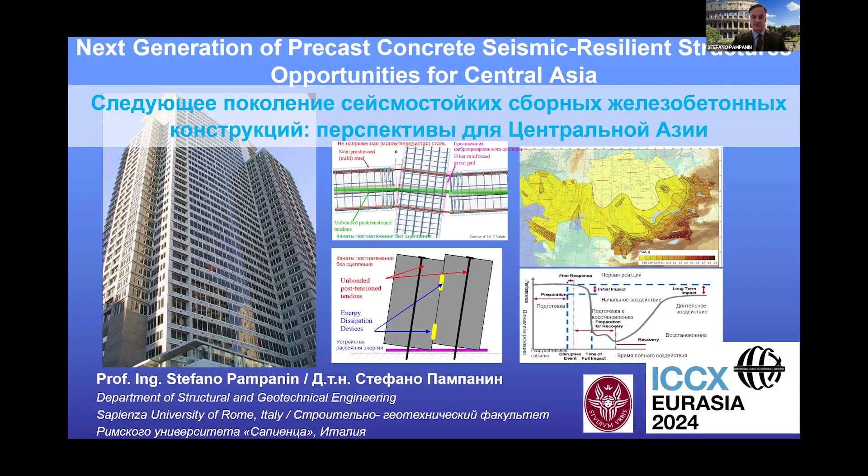If we go to see the seismic map using peak ground acceleration, which is a typical way to describe earthquake intensity everywhere around the world, very recently, like everywhere else, Kazakhstan has been provided with a PSHA, probabilistic seismic hazard map, which allows calculation of the probability of occurrence of an earthquake of a certain intensity within the lifespan of the building, or structure. It can be 50 years, and typically in 50 years we look at the probability of exceedance of 5%, or 10%, or 2% in 50 years.

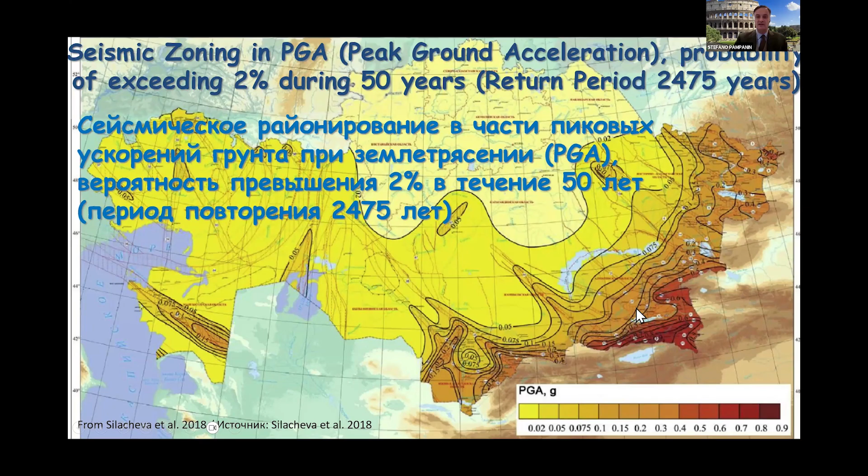And typically the design is for a 475 year return period, so 10% in 50 years. But what I want to show you here is a little bit higher earthquake, the 2,500 year return period, an earthquake supposed to have an exceedance of 2% in 50 years. If you think about 2% in 50 years for a lifespan of 3 generations, which is 100 years, it's going to be 4%, and the design level is going to be 20% probability of occurrence. So the level of peak ground acceleration is quite substantial, getting into the yellow zone and increasing the more we go to the southeast. In fact, Kazakhstan has been struck by very strong earthquakes of magnitude 7-ish.

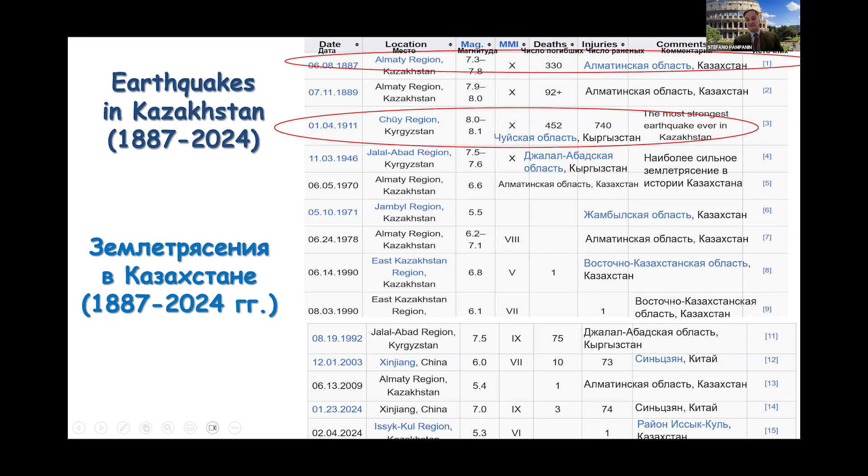7.3, 7.5, 7.9, 8. Especially in the end of the 1800s, in the Almaty region, there was a major earthquake, also called the Verny earthquake. Later on, in the early 1900s, 1911, there was probably the biggest one recorded, on the border with Kyrgyzstan, also called the Kemin earthquake. That type of earthquake event caused substantial collapse. So the region of Almaty, or not only Almaty but the whole of Kazakhstan and Central Asia, is definitely very prone to very severe earthquakes.

If we look at what precast concrete can provide the community with, precast concrete in seismic regions has been limited in use and development basically everywhere around the world for a few reasons. First of all, lack of confidence. The performance of precast concrete buildings, because of detailing and design issues, not because of the material, has not been adequate as people would have liked to see. So people lost confidence in the behavior of precast concrete in seismic regions.

There was also, generally speaking, the absence of rational seismic design provisions. Typically we're talking about the 1990s, and then later on things improved. In the 1990s, people were not very confident or comfortable using precast concrete in seismic regions, and there was a lack of knowledge — lack of seismic codes, but also lack of education. It was not being taught in universities. So very few engineers or architects were able to specify precast concrete properly for seismic design.

Later on, what happened? Typically the trend was to either avoid precast concrete or to allow it if it used an emulative approach. We'll see what emulative approach means — it's an emulation of cast-in-place concrete, whereby precast concrete connections are joined together using a cast-in-situ approach, and that has been a way to deliver precast concrete in seismic regions in a proper way.

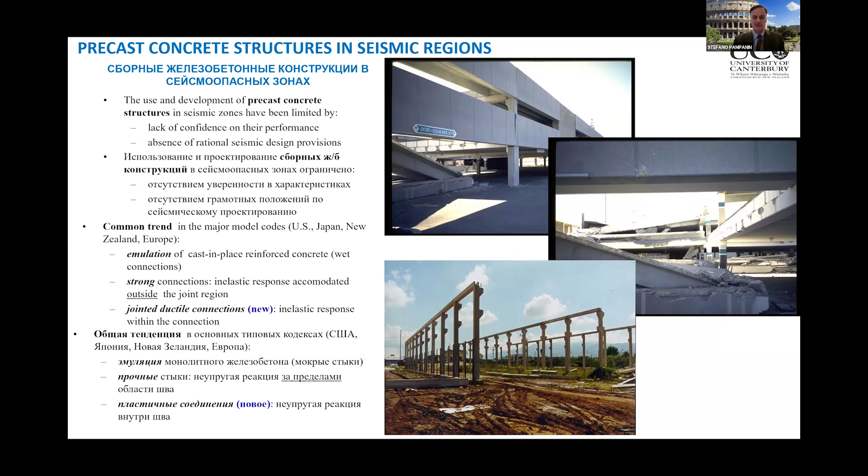But there is a third level, and that third level is really a breakthrough — a milestone in earthquake engineering, which has been applied in precast concrete and later on in other materials too. It's about jointed ductile connection. It's new. Jointed ductile connection is different from the old precast concrete approach used for industrial plants, and from the emulative approach, which is a bit less old but still obsolete compared to this revolution, which I'll be delighted to explore with you. I'm showing now the Russian translation to appreciate more what jointed ductile connection will look like.

Now let's discuss some fundamental aspects of seismic design of precast concrete. Precast concrete itself can be designed very properly if you know what you're doing, as with any other material. You need a design methodology which is appropriate — not just force-based design, as people typically use, but also displacement-based design, where we try to limit the deformation of the building for a given earthquake, such that the extent of drift — the displacement between two stories divided by the height, called drift — and the amount of rotation of a certain element are limited. So we are designing for a specific amount of displacement, no more than that.

Generally speaking, we need to understand the overall behavior: the structural system itself, the diaphragm, the non-structural elements, the foundation. The whole system has to deliver the seismic response as a package — it cannot be just one element or other elements. There should be a load path, the possibility of moving stresses through the structure properly. Detailing is fundamental — the connection detailing between elements, a beam and a column, a wall and the diaphragm, and the seismic resisting frame, needs to be properly done.

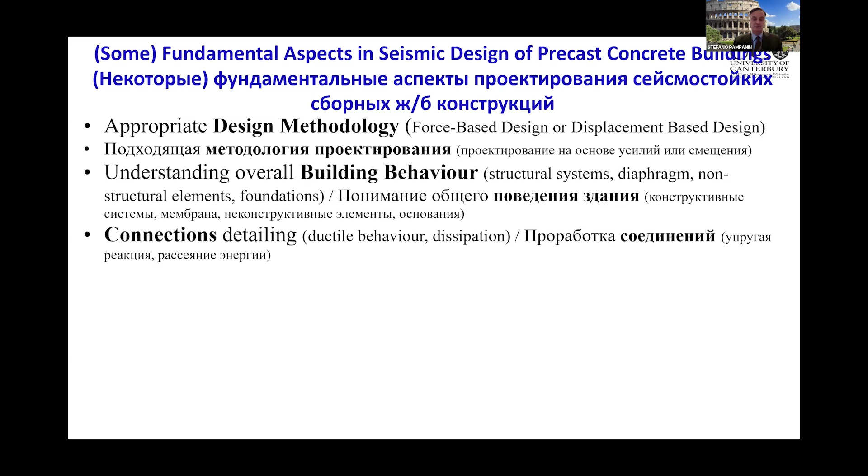Detailing is fundamental, as well as robustness. Robustness and redundancy are not exactly the same thing, but it means that during an earthquake we have a different alternative load path. So the opportunity and possibility of our building to resist the earthquake is provided by more than one type of element and structural system.

And also, if something goes wrong, there is a plan B. There is an opportunity to back up the behavior of the structure, because you're not relying upon a single structural system or a single load path. Displacement compatibility, the compatibility of movement between the seismic resisting system and the gravity system, should be checked very carefully. It's not only about strengthening a building with some elements, but about checking the full movement of everything. At the end, it's about detailing, detailing, and detailing.

So really, at the end of the day, we need to provide a system whereby detailing is the devil which we have to fight against. Otherwise things can go wrong. If detailing is properly done, that will count more than any computational model you can provide, because numerical models do mathematically what you input. If the input isn't good enough, the output won't be good enough either. But detailing, using conceptual design as a proper engineer would do, is fundamental for good behavior in a seismic region.

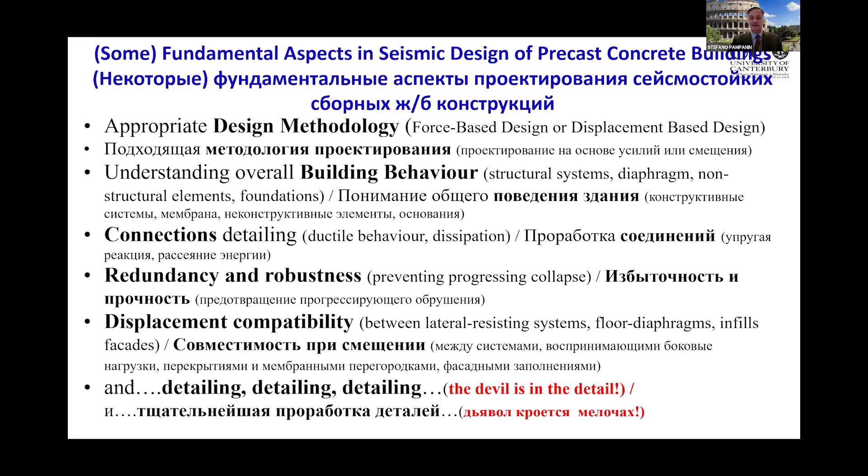We are going to start by looking at hinge connections, the old way. I'm going to show you what has been done everywhere in the world, including in your own country, very specifically for precast industrial buildings.

This type of construction is very powerful. For gravity design it can allow you to go for long spans, with beams sitting simply on corbels. These corbels drive the forces into a cantilever scheme, which is not optimum, but that's what the solution was. So a cantilever column is actually the seismic resisting system with only simply supported beams, not coupling the behavior. These systems are very good for gravity loading, but not good for earthquake loading.

And this is what we unfortunately found. But we'd like to explain that we don't have to throw away everything here. It's a matter of detailing the connection between beams and columns. If we can do it differently than just sitting on a friction corbel, or maybe using a dowel action, and improve that connection between beam and column, and between column and foundation, we can make the system more robust. That will be the way.

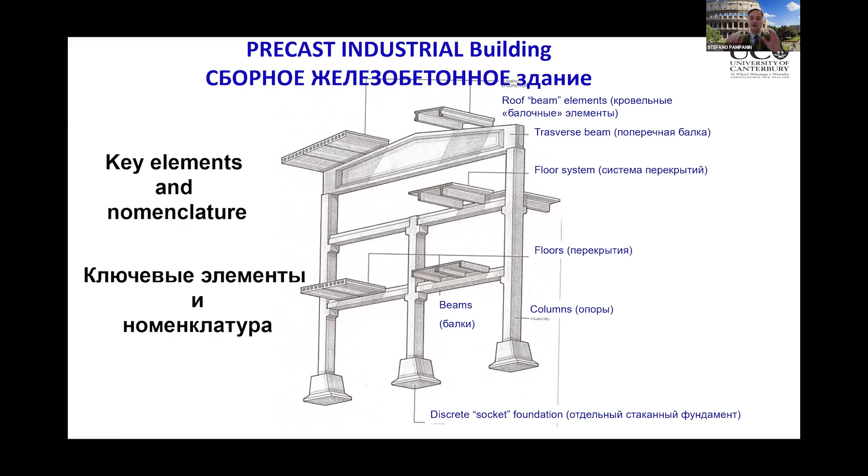So this solution number one, which has been the oldest and not very appropriate for seismic regions, I would like through the presentation to show you the evolution of hinge connections into something more - option 2 - and into something even more - option 3.

Now, we do know about industrial buildings: precast car parking, malls, warehouses, department stores. These are large column-free type buildings, and the idea was to push for pre-stressed and precast concrete elements which could go for long spans. The problem with this solution, though, is that you do not have a proper moment-resisting connection.

So the advantages are quality control, speed of erection, dry construction. You can go fast, and have good quality control off-site in your plant. Once you go to the building site, you don't need a very high-skilled crew for construction - you only need riggers, people capable of using a crane, to mount what is essentially a Lego type of construction system.

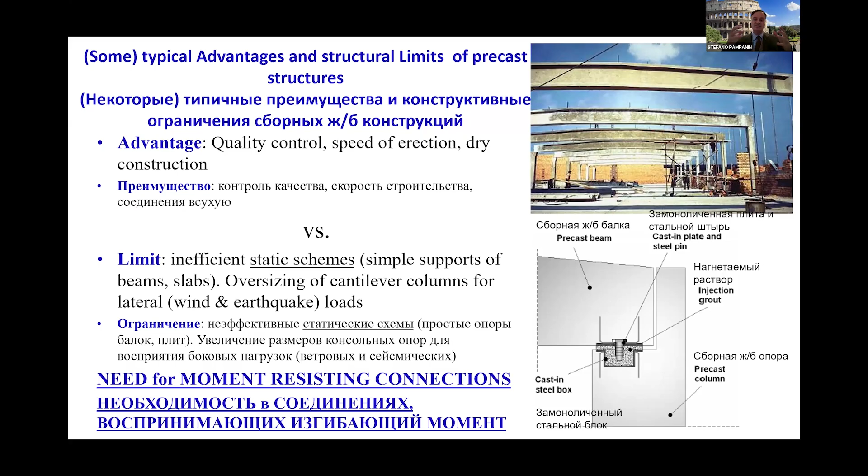But these advantages are undermined by very important limitations. The structural systems themselves are not well connected - actually they are even not connected, or connected in a way that is not efficient. So the structural scheme is not capable of providing moment resistance. We do need, in seismic regions, to provide moment resisting capacity between connections. Otherwise the system will be too weak under lateral loading. It would be very good for gravity loading only, but very weak for lateral loading.

So let's see what has been developed in the few years since the old way of doing things. These are examples of the emulative approach.

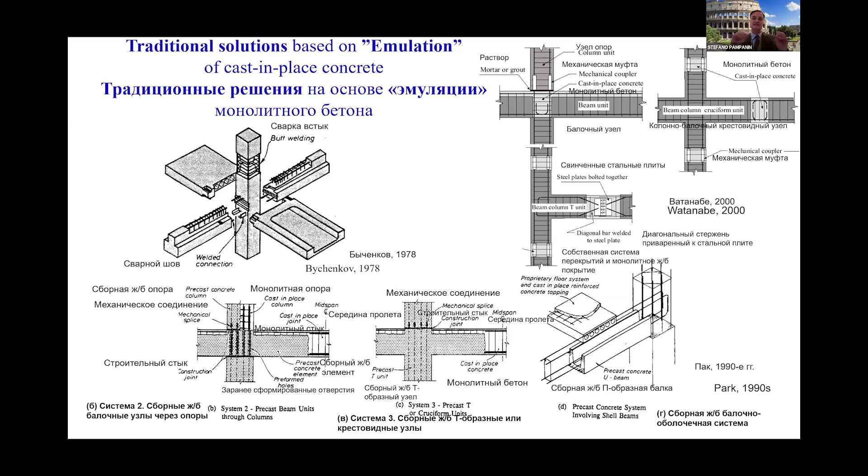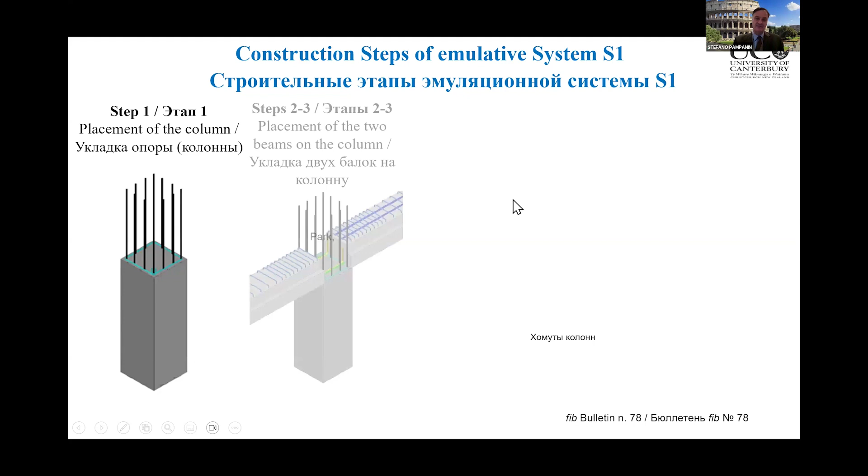There's been plenty of alternative solutions for that. I want to show you some of the latest developments from bulletins of the FIB, the International Federation for Structural Concrete, which I strongly recommend you look at and become a member, because you can find very interesting solutions explained from a conceptual design point of view, a mechanical modeling point of view, a numerical model point of view, behavior, guidelines for better design, and more about durability, hardware, detailing, connection, and technology.

So you start from a column, and in the emulative approach you have precast beams sitting on the corbel, and then you have a cast-in-situ connection of the whole system. The beam can be a rectangular type or a U shape, which we call a shell beam.

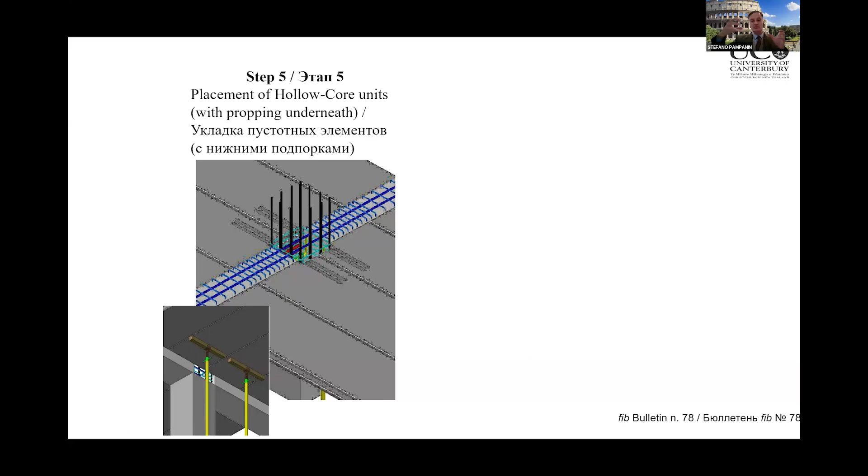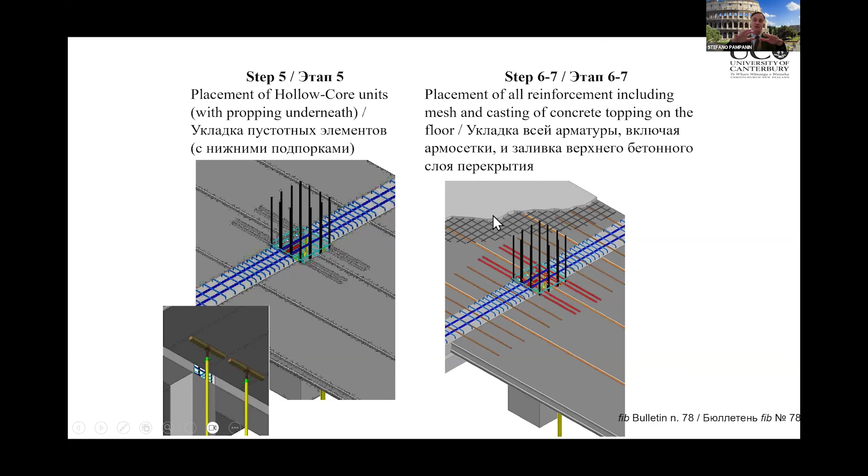Then you come to the flooring system. It's supported on shores, and then you have a cast-in-situ topping. The diaphragm action works through a welded wire mesh or more proper reinforcing detailing on the flooring system, and the whole system becomes monolithic. But it started from precast elements being connected together with a cast-in-situ approach.

Now, these are examples of what this emulative approach would be, and I'm going back on purpose to L'Aquila. By the way, you'll have noted the screen behind me is the Colosseum. I'm calling from Rome, the University Sapienza of Rome, where I'm now working.

I've been traveling around the world in my career and my life, from Pavia, Italy, in the northern part of Italy, to California, San Diego, and then 16 years in New Zealand, and then back to Italy in Rome.

The reason I'm showing the Colosseum is not only because it's marvelous, but because it's actually an example of prefabrication, which looks like precast concrete frames in the older ages. I will explain how, by taking hints and suggestions from that way of doing prefabrication, we can deliver a much higher performing, low damage seismic resistant system.

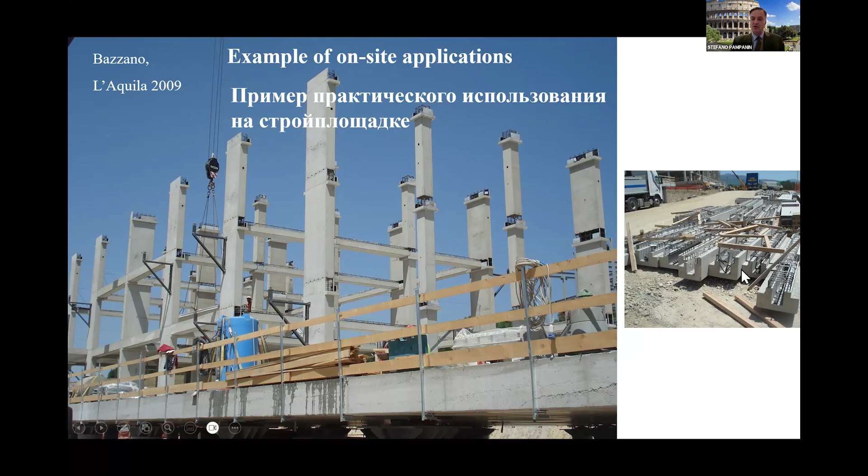This is option 3, which I'm going to show you later on. But these are examples of the emulative approach developed in Italy after the L'Aquila earthquake: shell beams, which are connected together with other elements using a wet connection. They can do an excellent job in providing semi-precast elements with a more moment-resistant connection.

But there are consequences and limitations. Let's stay on the positives for now.

What are the limitations of this connection detailing based on the emulative approach? Precast, then precast, then wet connection — they do not exploit the advantage of precast concrete. Basically, you're not able to go as fast as you could because the precast concrete is slowed down by waiting for the casting of the wet connection to cure.

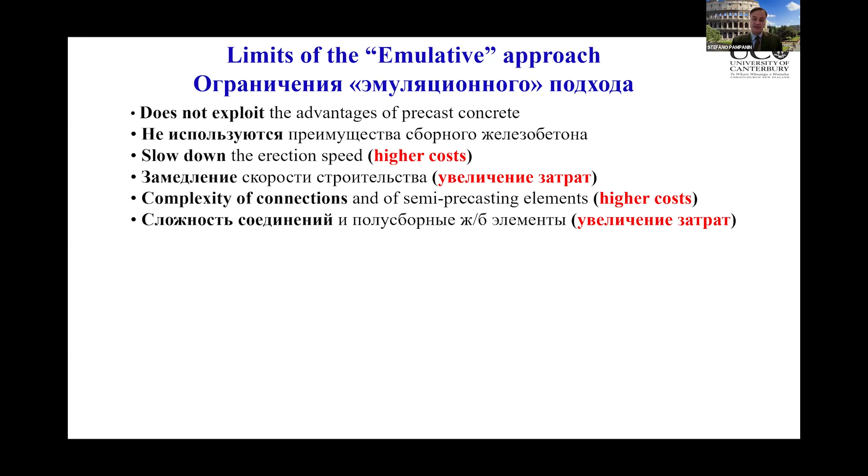So you have to wait a bit. Also, slowing down the erection speed means higher cost—your client is paying more, the mortgage on the building costs more, and you have to wait to sell the components, the apartments of the buildings, and so forth. But also, the connections are quite complex, requiring quite a manufacturing skill, and time in the plant. Skill and time means, again, money.

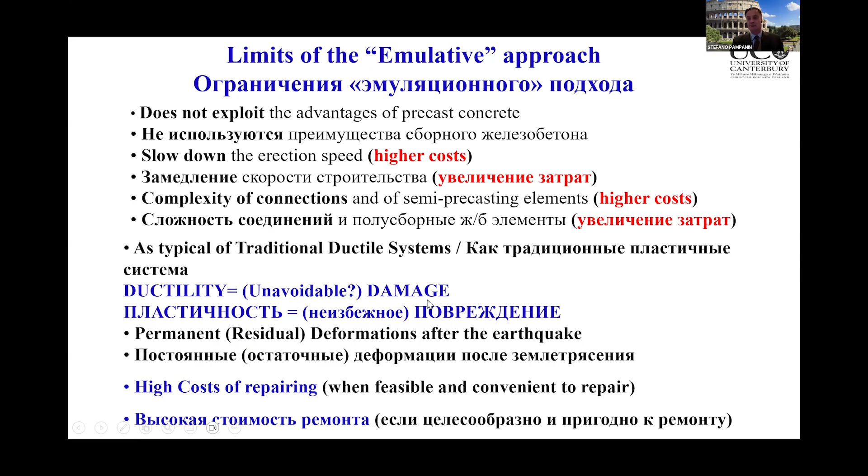In addition, a traditional emulative system will form a plastic hinge. The plastic hinge is a typical way for any concrete or steel building to survive an earthquake—it's the way to damage in a plastic manner the connection between elements through that plastic flexural type ductile behavior. So if you deliver a precast concrete solution with the emulative approach, you would necessarily have almost unavoidable damage. We don't want that, but this is what every code in the world allows.

So I want to show you something which is a dramatic experience that I unfortunately lived through. So I'm here reporting back to you. In Christchurch, New Zealand, we are going to the other side of the world from Italy—nearby, more near to you.

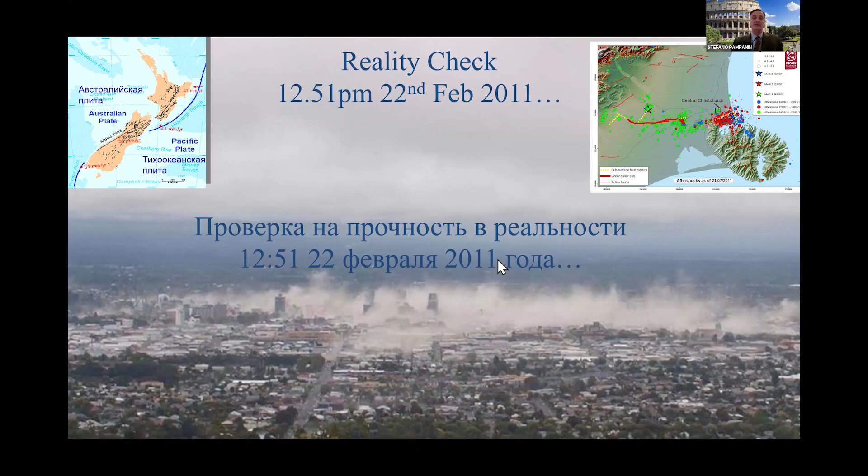In 2010, 2011, there was a series of earthquakes; specifically the 2011 one, on the 22nd of February, destroyed the city of Christchurch. That earthquake caused quite a number of victims, 185, but also caused a significant social and economic impact because the whole city, the CBD, the central business district, got destroyed.

So I want to show you an example of an exceptionally good 22-story precast concrete building designed in the 80s. Excellent design, which today we are still using as an example of best emulative approach made of precast concrete.

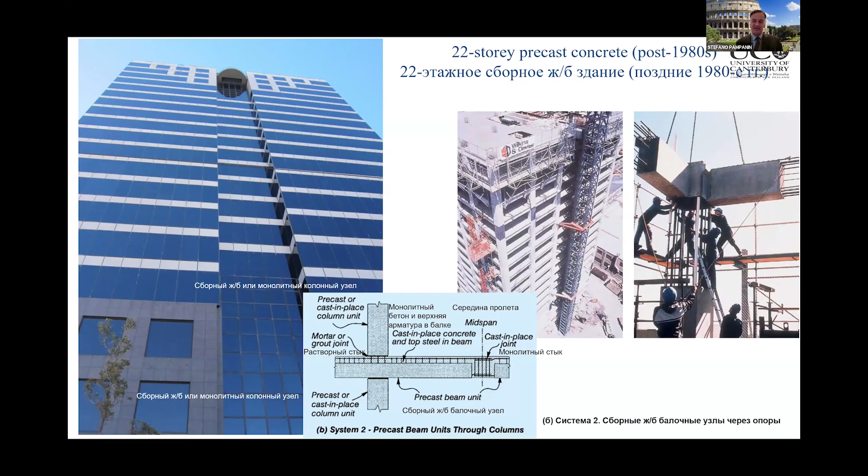You can see here the precast concrete elements. They are getting connected together, as you can see here, at the quarter or fifth of the span, or in the middle of the span, where the moment demand is going to be lower because of the seismic action. This earthquake pushed the building to the limit.

And so the earthquake itself showed that the building was designed very properly. The building developed those famous plastic hinges—we call them plastic hinges in the beam. Any new design around the world will rely upon these plastic hinges in the beam.

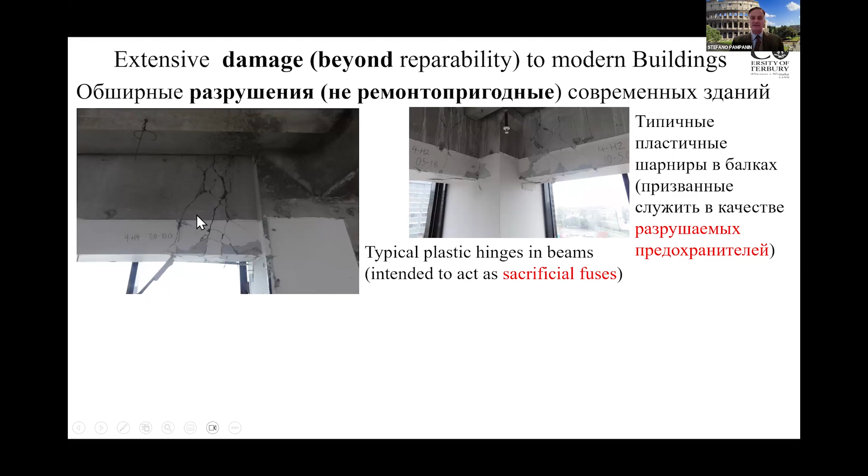The problem is that after you have this plastic hinge in the beam, you don't know how to repair it. If we make a comparison with a car crash test, no one will be surprised to see, or to remember, that in a crash test our car is destroying locally, in a plastic behavior, the front part to protect the pilot. So the car is actually plasticizing in a specific region, which is designed specifically for that purpose.

And the purpose is survival of the pilot, which we will call life safety. In our seismic design, we call this life safety. So what does it look like?

In a numerical model, which nowadays we are able to perform—and now we're able to go faster—this is a representation of our plastic hinge in our car crash. It's not a car crash, it's an earthquake crash against our building. So our building is going to go through the earthquake crash test, and is going to develop that plastic fuse. That plastic fuse allows the building to protect the life of the inhabitants, but not to protect itself.

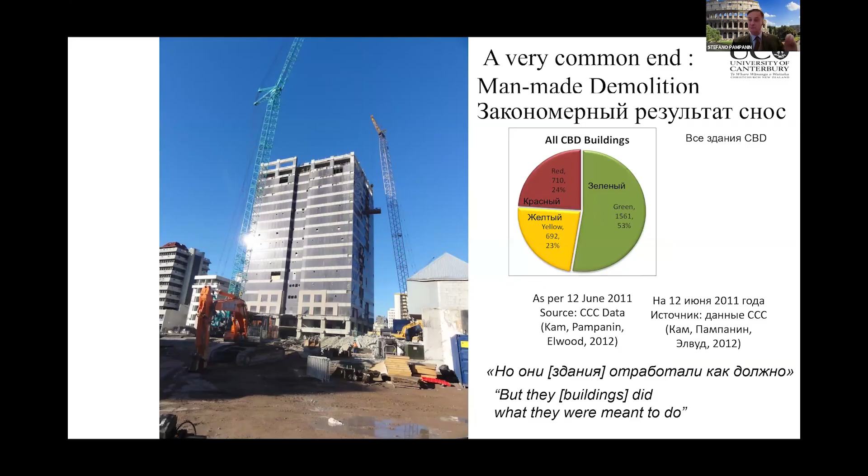So what was not clear for quite a few decades, when human beings were improving the seismic resistant philosophy, was being able to actually concentrate the damage into a specific location instead of allowing the building to collapse. It was a major revolution in 1960, and it did come from New Zealand.

Park and Paulay developed what we call hierarchy of strength, or capacity design. The theory of the chain that Tom Paulay was using mentioned that the weakest link of the chain makes the chain's strength. So the strength of the chain in tension is actually due to the weakest link. If the weakest link is ductile, you're going to have a ductile mode of failure. If the weakest link is brittle, the whole chain will be brittle—it doesn't matter what the other links are going to do.

In the 1960s, we completely changed our way of designing for earthquakes. Instead of having small columns and big beams, Park and Paulay suggested stronger columns and weaker beams, to the point that the weaker beams were supposed to have a plastic hinge. And that's exactly what we've been doing, designing properly for plastic hinges in specific regions.

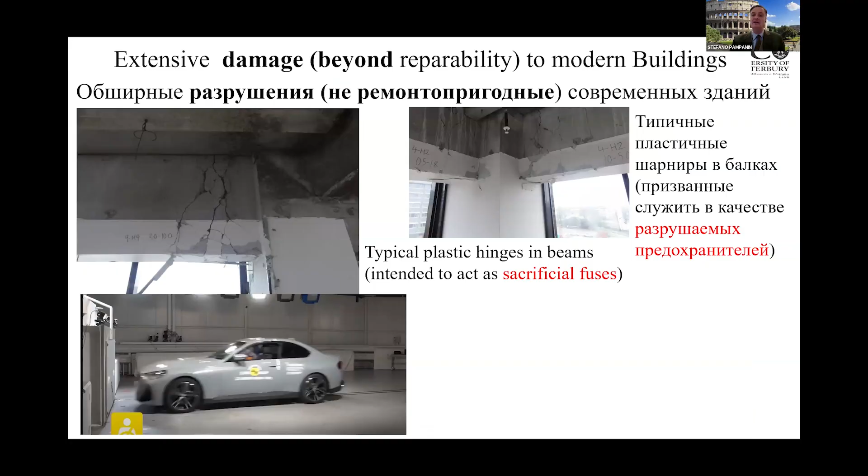Let's remember what these plastic hinges are doing. They are protecting not the car, they are protecting the pilot. They are doing their job for life safety. And that's exactly what we're doing: designing for life safety.

The cost to the population, for the whole country, was 25% of the gross domestic product. So we are not able to afford, as a single family, as an individual or multiple owner of a building, or as a city, such a disruption of our community in the long term.

Of course, the most important part remains life safety, and we need to deliver modern buildings capable of providing that. But precast concrete can do that kind of protection, and even more—that's exactly what I'm going to show you. What has been shown so far is the standard 2024 state of the art of seismic resistance that we're typically able to provide, but we need to do something better.

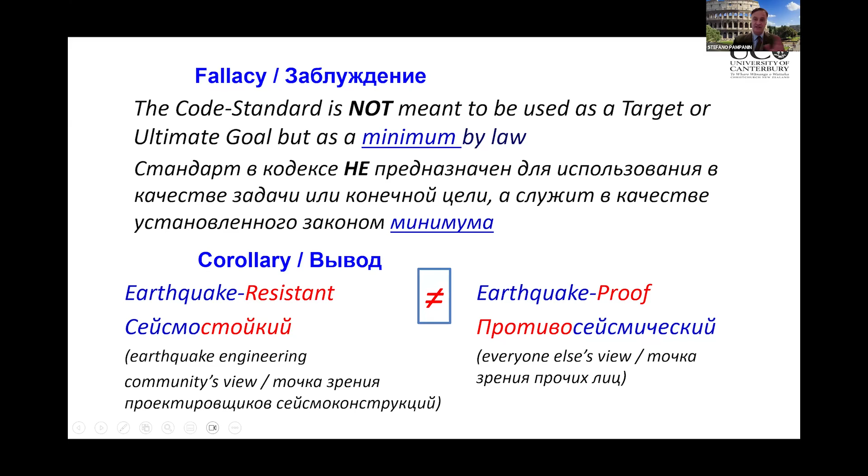That's not what we have by law. By law, everywhere in the world, we have a seismic-resistant or an earthquake-resistant building, which is exactly different from, very far away from, earthquake-proof. It's not earthquake-proof.

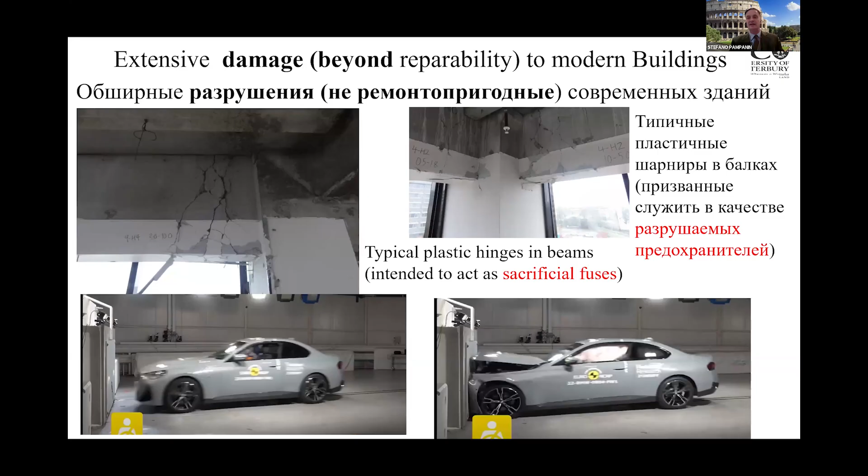This car over here, no one ever thought about calling this car anti-accident or accident-proof. No one thinks a car is accident-proof. People hope that it is life safety proof, so it's actually death proof. It's capable of providing life safety, but we don't think about the car being repairable after a major crash.

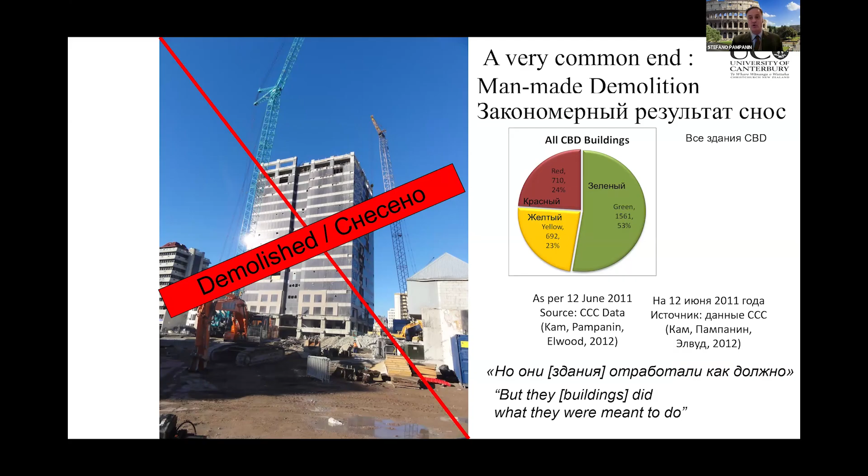We do need to start thinking about what to do for earthquake-resistant buildings, because if they were like normal cars, which are not repairable, then we will be following the same path of what happened in New Zealand, which is a very high-level modern country.

So let's keep going fast and quick. What should we do? We should be targeting a higher performance. In a nutshell, we have to raise the bar. We need to design a building such that the building itself will be protected from a crash test, not only the people living in the building.

This means something which can be a problem. If it is going to cost too much, then people will not be doing it. If it's going to be a matter of designing a nuclear power plant instead of a house, obviously it's not going to happen. So I give you good news.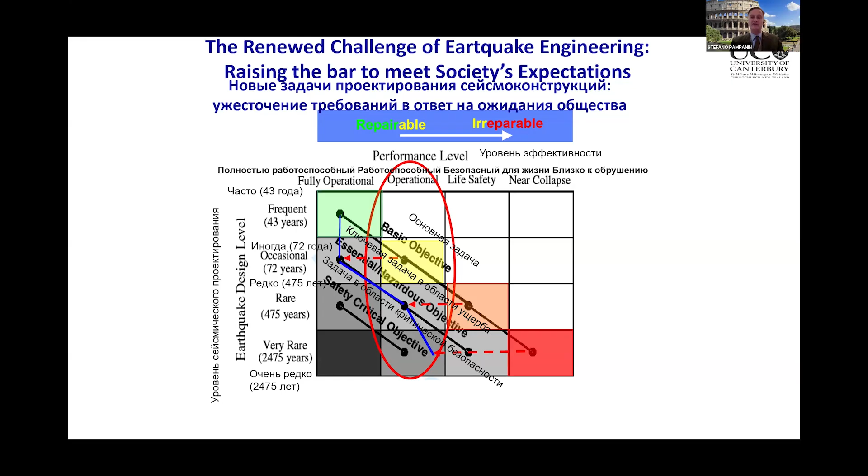The good news is that, for people listening in real life in Almaty or virtually remotely, we do have the technology in 2024 to raise the bar and create almost, not exactly, but almost earthquake-proof buildings. We do not have earthquake-proof, but we are able almost to get there. And precast concrete has the solution to make it happen.

So going back a little bit to the presentation of today, it's about opportunities from Central Asia to use precast concrete. And I'm telling you that precast concrete has been used widely and fantastically in every country in the world in some form of option 1, but in seismic regions it doesn't work.

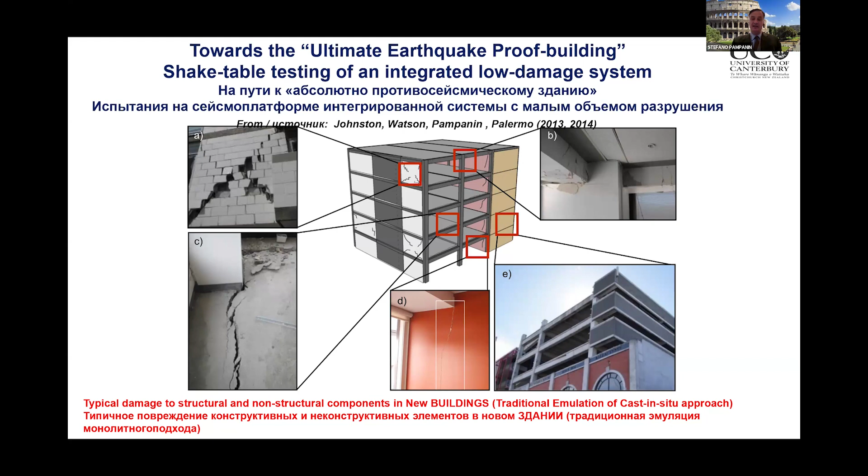With option 2, which is great, and I would suggest you at least use option 2, the emulative approach, but in seismic regions it's not sufficient enough. There's going to be a cost associated with the repairing, which we don't want to have. So what will be the next level up? That's exactly where we're going.

Jointed ductile connection - we call them low damage technology. Low damage technology means that after an earthquake, we would like to have low damage in the car, in the building, and we should be able to repair it without too much cost. There's a new generation of seismic resistant systems, which I don't call earthquake proof, but they are very, very nearby to becoming earthquake proof. They are low damage. We call them low damage.

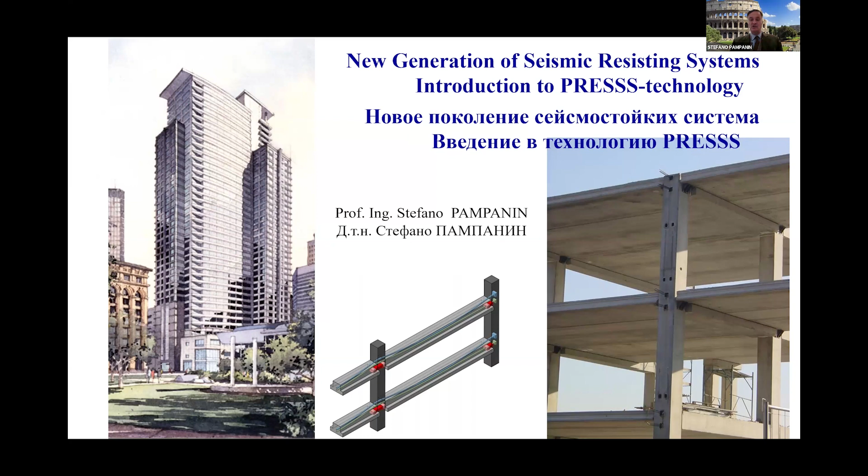This low damage seismic resistant system has been developed starting from the late 90s, so we're going back 25 years ago, in United States, a big project coordinated by Professor Nigel Priestley, who was the top professor in earthquake engineering, number one in the world at that time. Park and Paulay and Priestley.

Park and Paulay were in New Zealand. Priestley was a student of theirs, doing his PhD, then lecturer, then professor and engineer, working with them as a PhD student of Park and Paulay. Then he got recruited in San Diego, California, in the 1980s. And at that time, he developed, through a major project with the precast concrete industry in the States, a new solution, a new way of working on it.

Thanks to an amazing team - I'm referring to John Stanton and Susie Nakaki, for example - who tested, with plenty of other people, this 5-story building in San Diego.

It's a 5-story building which was tested as the largest test using precast concrete, with a revolutionary, non-emulative approach. I had the honor in 1998, 1999 to be part of that. This is me 25 years ago, and 25 kilograms ago if you wish, but I still maintain the same passion and enthusiasm for novelties.

So learning from those ropes in the 1990s, what are these types of connections? There's quite a lot of legacy that has been implemented into this connection. They are dry, elements connected through tendons. So we are basically using the same concept of post-tensioning which has been adopted for bridges.

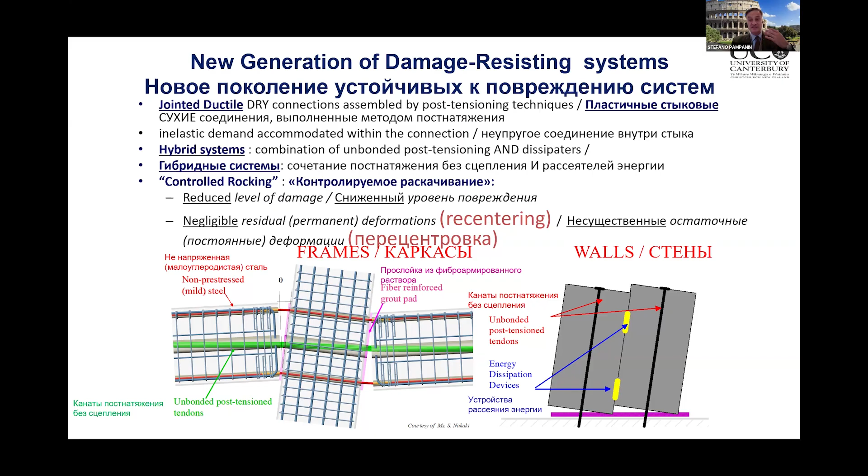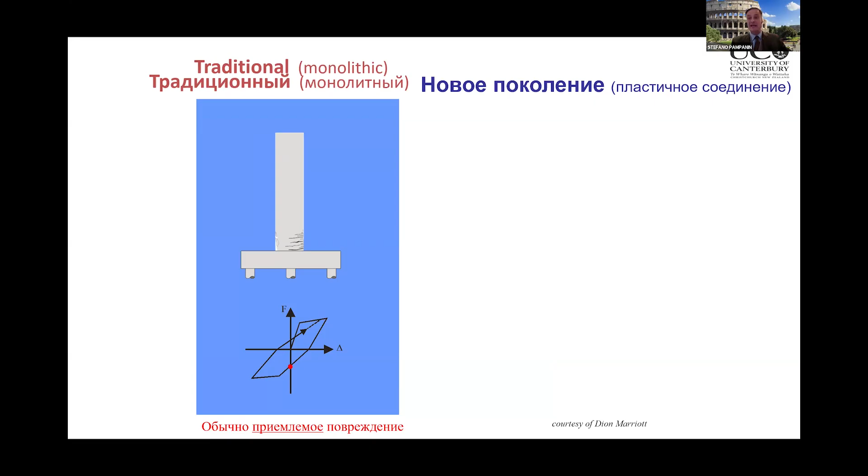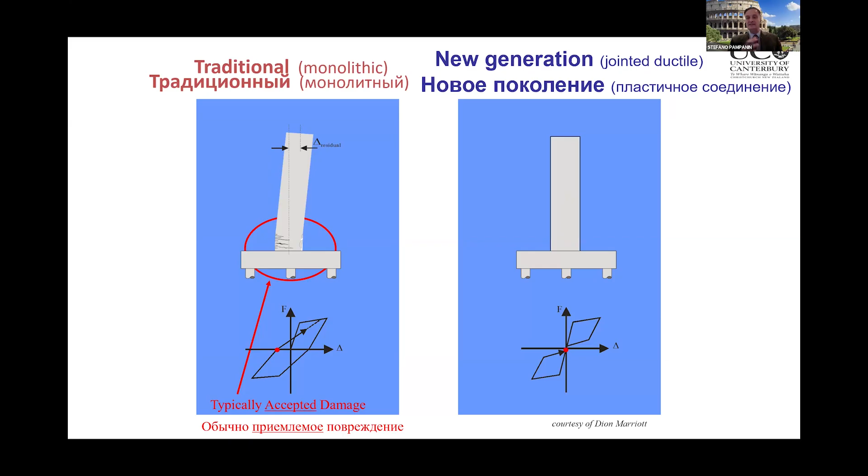Let's see what it looks like. In a traditional concrete approach or a cast-in-situ emulative approach, you're going to break back and forth, and you're going to have this famous damage which we don't know how to repair. In the new generation, the terminology is rocking. Rocking is actually this lifting up and coming down, lifting up and coming down. By doing this lifting up and tensioning the spring, you're basically able to go through an earthquake without damage or with low damage.

Where does it come from? I told you there is a reason for which I was using the Colosseum today, not only because I'm in Rome, but because this way of constructing was one of the main reasons we are now able to develop a modern low damage technology.

This has been revolutionary, taking that type of rocking system and adopting it into a rocking, post-tensioned, new modern way of doing precast. It's literally a milestone in earthquake engineering.

If the first milestone, probably the main one, in earthquake engineering was the capacity design of hierarchical strength that I mentioned, from Park and Paulay, Professor Park and Professor Paulay at the University of Canterbury in New Zealand, which I then, not coincidentally, went to because it was a fantastic place to learn, and I stayed there for 16 years.

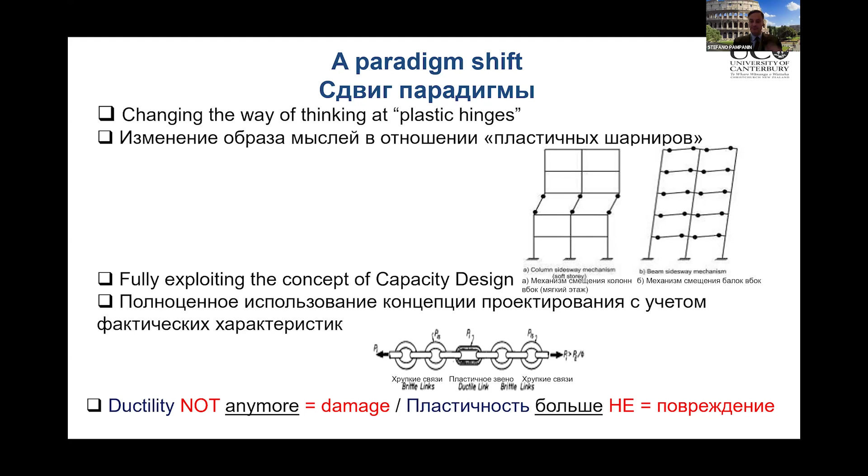So if capacity design was a way to protect the small columns and big beams by making the columns larger, then the next step was to make the weakest link of the chain not only ductile, but also repairable. And so we started doing this type of evolution.

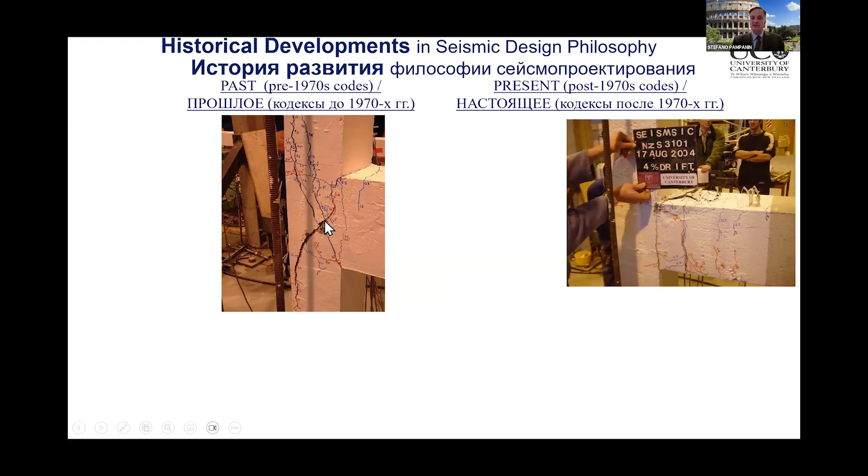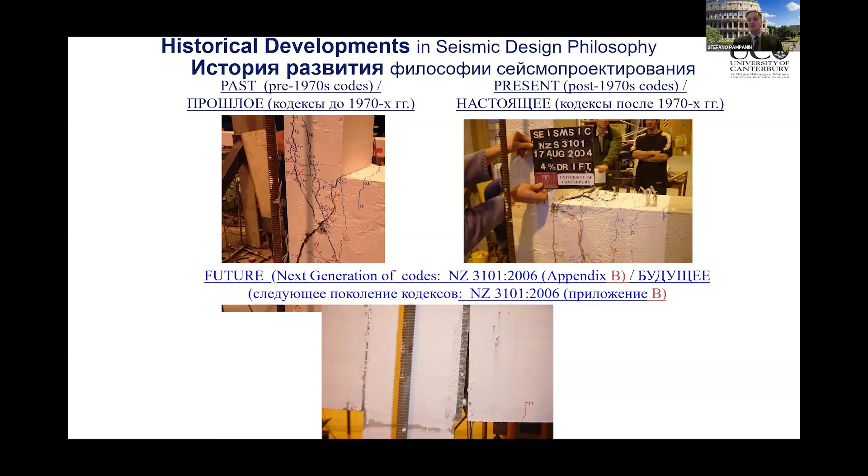In the pre-70s, older type of beam-column connections were breaking in shear. In new connections, they actually break in a nice way, in a plastic hinge, but we don't know how to repair them. In the newer rocking temples, we are able to go through an earthquake with less damage. The next level up became repairability.

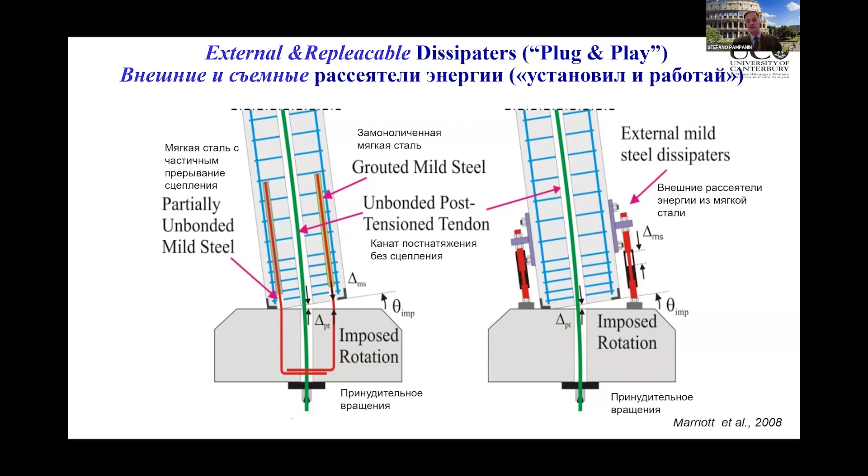We called it plug and play. This is a piece of steel placed from inside to outside, and it's a fuse. You see the fuse? It's actually like an electrical fuse, except we call it a seismic fuse. This seismic fuse, which I developed, I did not patent, so you are free to use it with my team. We developed it, tested it, and without patent, you are allowed to use it for free.

What happens? This fuse can become a gadget. You create a fuse, place it inside an anti-buckling tube, and then fill it with epoxy or mortar. This becomes your new armor. It costs $15, $20. So it's really a cheap way to provide external armoring, external steel, instead of internal steel.

After an earthquake, similar to how we typically change light bulbs in a normal day without being an electrical engineer, everyone will be able to change the plug-and-play devices, the plug-and-play fuses, without being an earthquake engineer. You can go to the supermarket and buy your extra small, or whatever size fits within your living room, bedroom, bathroom, and so forth.

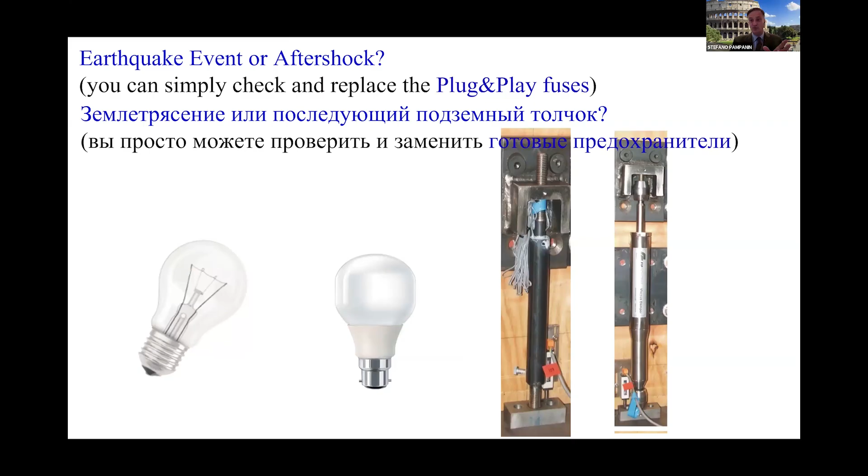So this is the extent of earthquake-resistant technology evolution. Let's call it progress. The progress in earthquake-resistant technology has been unbelievable.

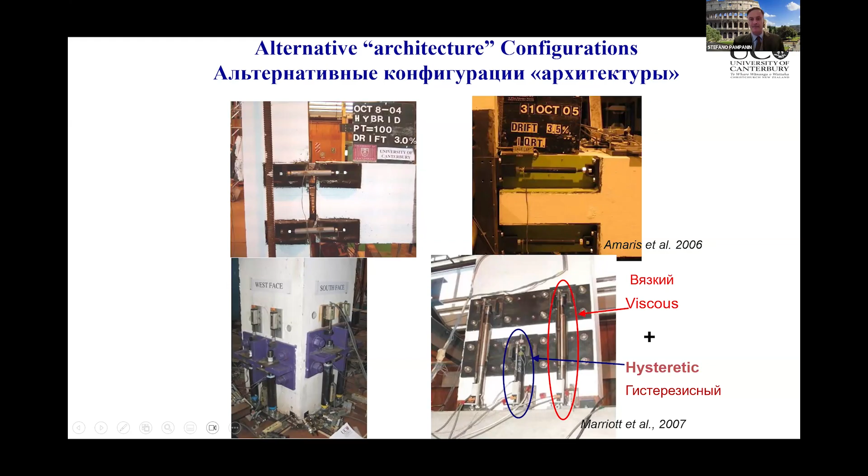This is all my research team in New Zealand. We have been pushing hard since 20 years ago, 2004, 2005, 2006, and kept going with not only beam column joint connection, wall to foundation system connection, bridge piers to foundation system connection with different types of architectural features of plug and play, but also prepared many experimental tests which became real buildings in real life.

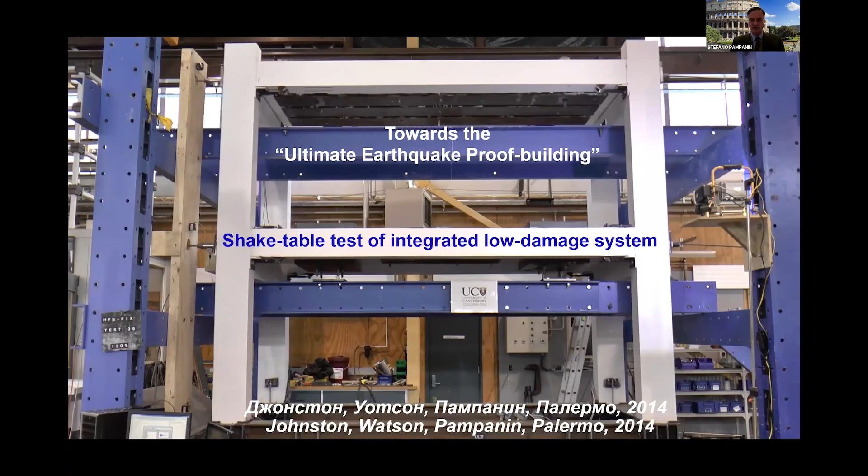So let me show you what this test of an earthquake almost looks like, you should be able to hear the sound. There's a post-tension here, it's a precast piece connected with a precast column, and there is a rocking system, which I will show you the next level up in the next slide. There is no damage whatsoever.

So if we go to the zoom, you will appreciate this movement. You see the opening of the gap, meaning it's opening, there is no damage. Again, there is a precast concrete column, a precast concrete beam, and there is a tie, horizontal post tensioning, tying together the whole system.

So this is the way to reproduce the ancient Greek temple and make it in a modern engineering way. And we are able to deliver the best solution for the community, which is earthquake resistant as they think.

Now, how can you design it? Feel free to go see the FIB Bulletins. FIB Bulletin 2004 was prepared by Bob Park as chairman and Fumio Watanabe-sensei from Japan, and I had the honor to be part of that committee as a young fellow.

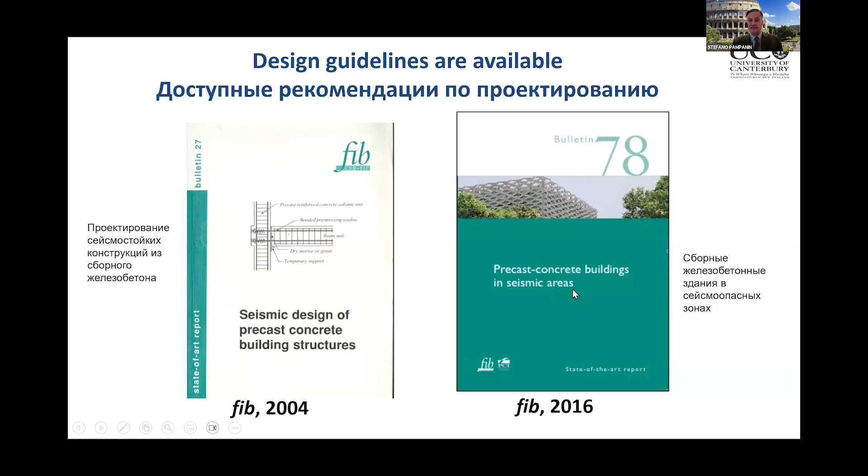And then more recently, with our great friend known to everyone in this large committee, Professor Spiros Tsoukantas, a Greek engineer and professor, did an amazing job, not only in Greece, not only internationally, but also in India, where he pushed hard to get India updated to precast concrete. If he was here, I would certainly have been delighted to have a co-presentation with him to show you the latest discussion we implemented in the FIB Bulletin 2016 about detailing for precast concrete in seismic regions.

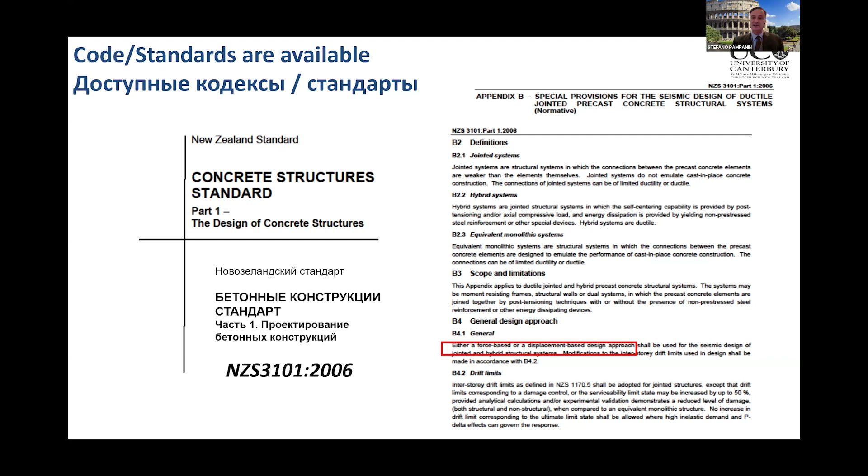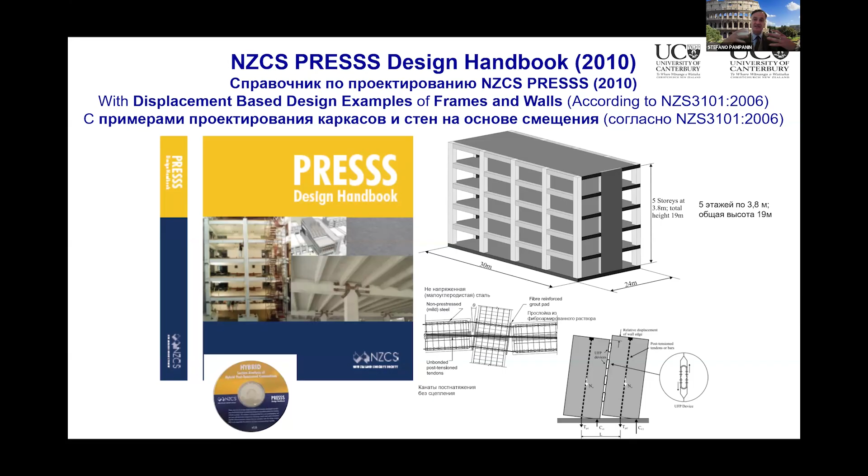We do have a code. The New Zealand Code 2006 has the opportunity to design this type of technology, and we did deliver a design example. It's in English, and maybe we can think about providing a translation for your own engineers, but we have a full design of a 5-story building as a design example, made of precast walls and precast concrete frames with this post-tensioning rocking system.

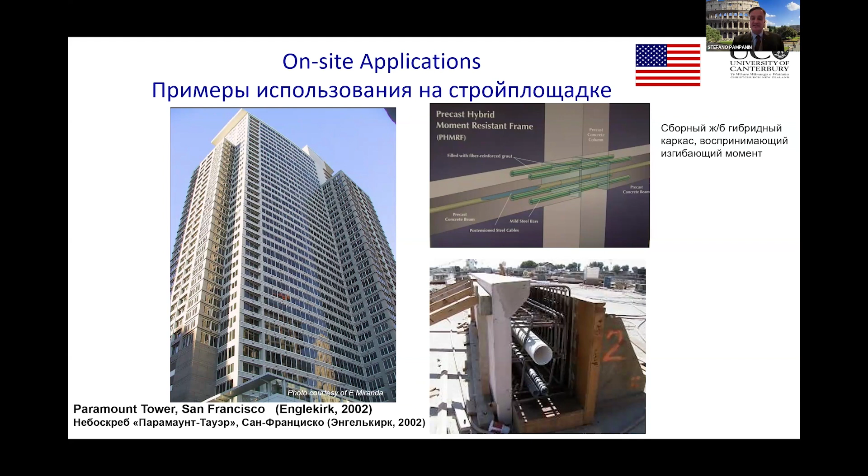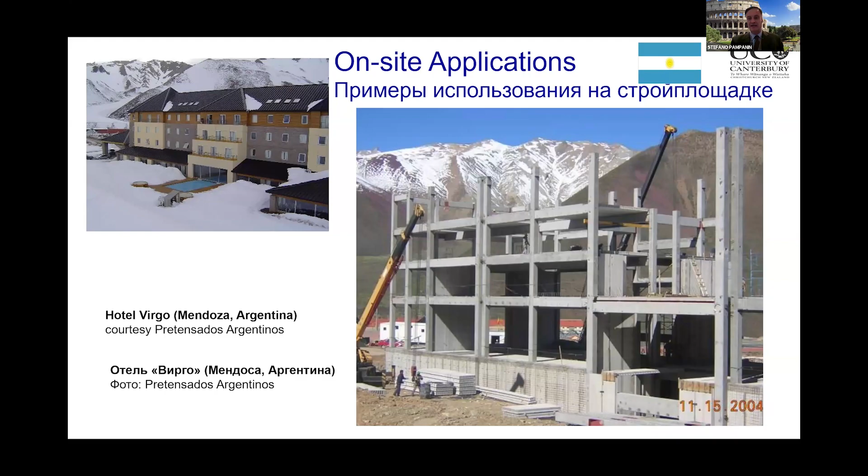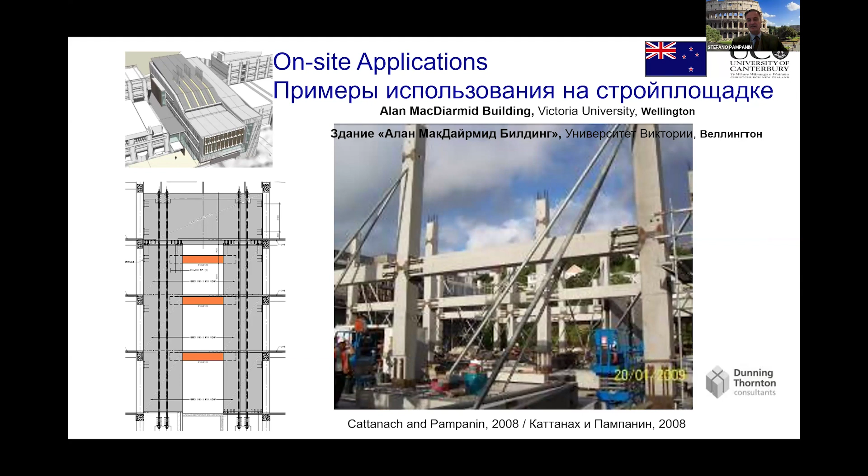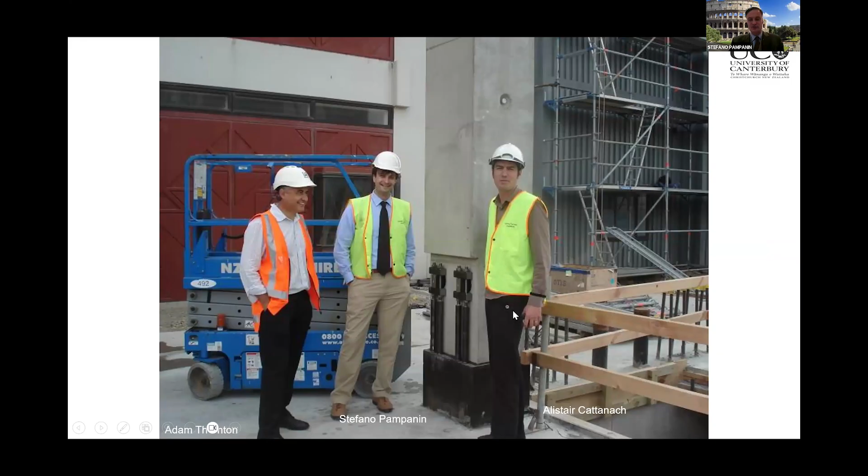People have been following and applying this in Argentina, in Costa Rica, and then in New Zealand, obviously, it was us pushing very hard. This is the first in the world where we applied the plug-and-play devices, in Wellington. These buildings are really nice and neat during construction because they are self-standing, it's really like a Lego system. And that's a younger me with two colleagues, Alistair Cattanach and Adam Thornton, directors of the engineering consulting firm we work with.

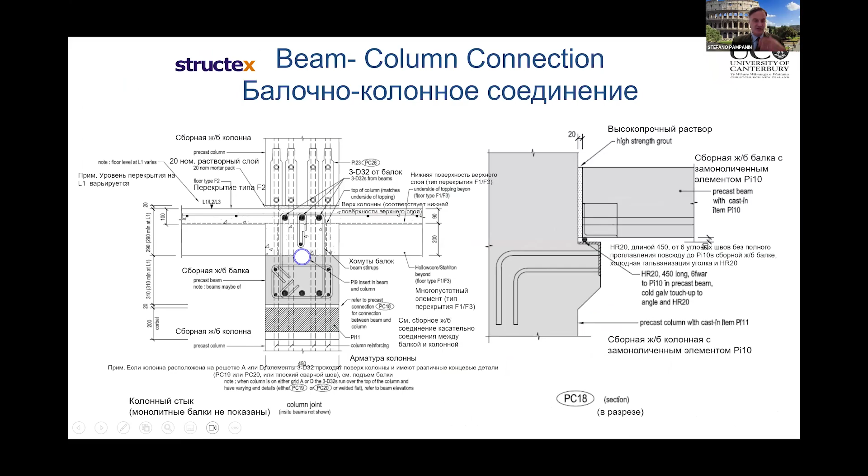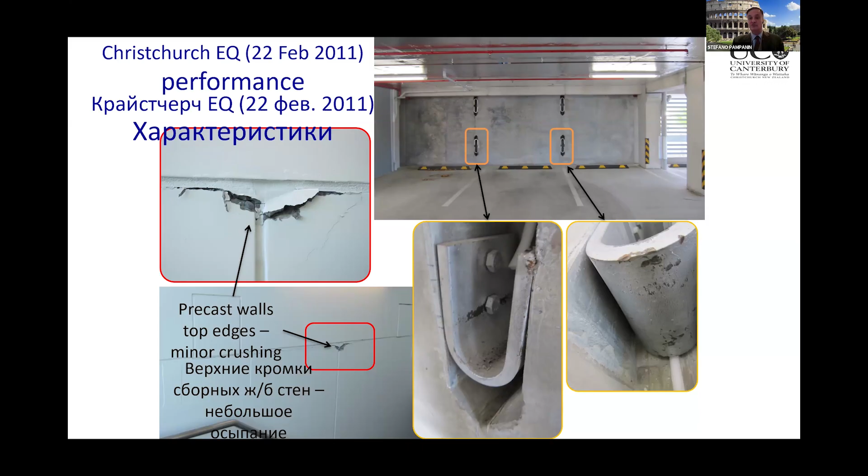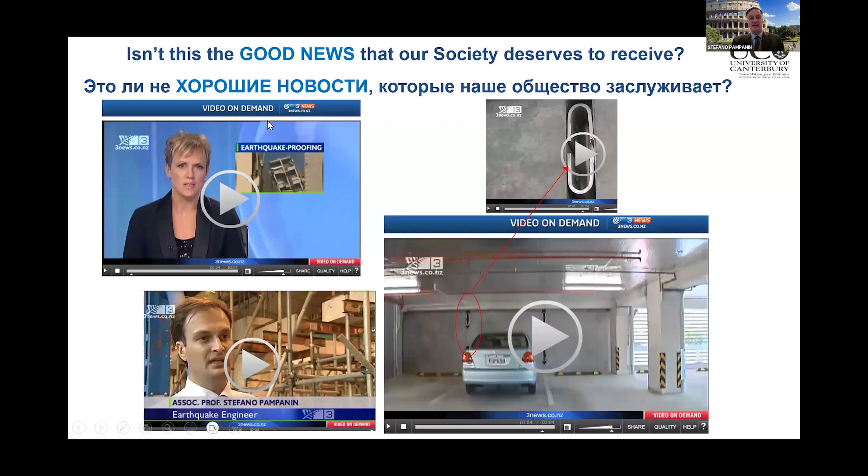That building was actually used as a private hospital, and it went on the media. The media was asking, what is this? How does it work so nicely? So everyone became aware of this type of technology, and more people wanted it, not only after the earthquake, even before, to be honest.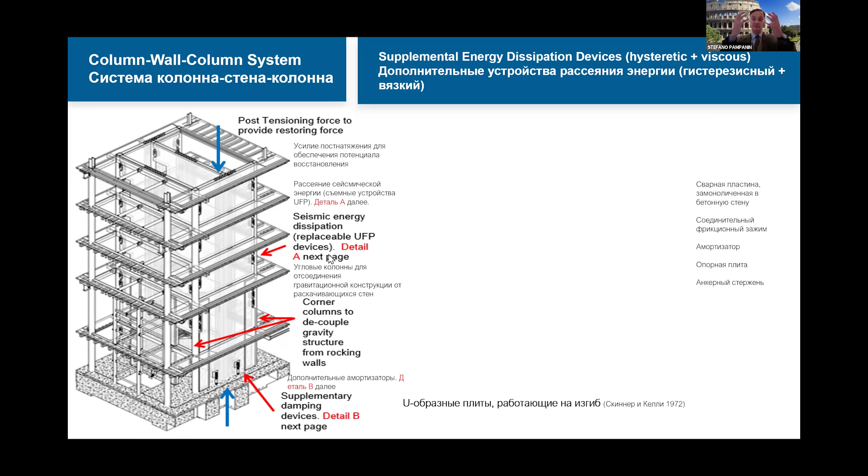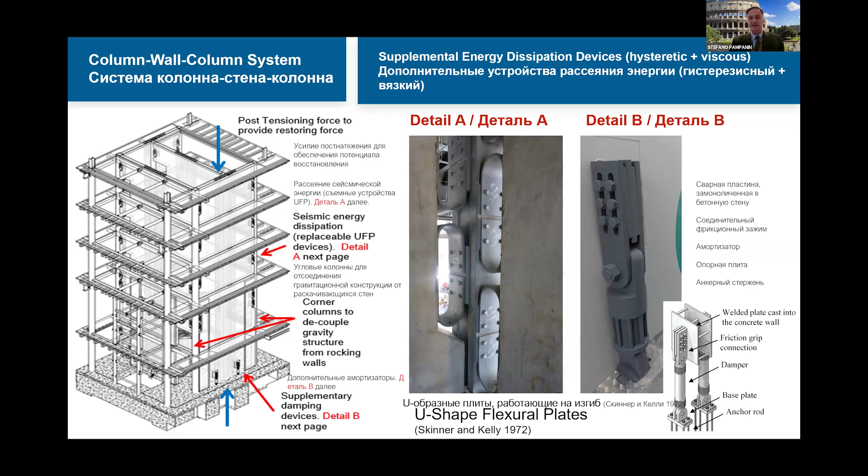This Central Library in Christchurch, which is an amazing architectural feature, is using heavy precast concrete walls with post-tensioning, with different types of dissipation connection detailing, a masterpiece of plug-and-play design to deliver seismic resistance. And the most important part is actually how it got constructed.

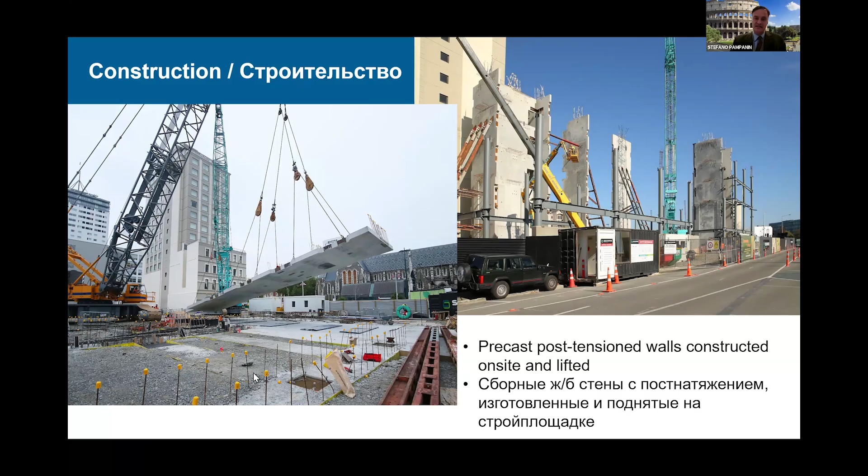The solution was to have segmental precast walls post-tensioned together, but it was more efficient to have the precast cast on site. So the precast walls were cast on site, and then lifted up into place to make it happen. I want to show you a last video.

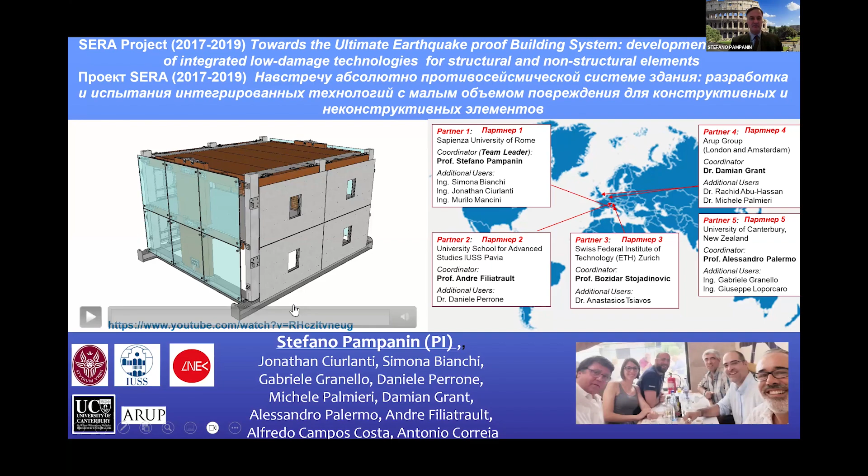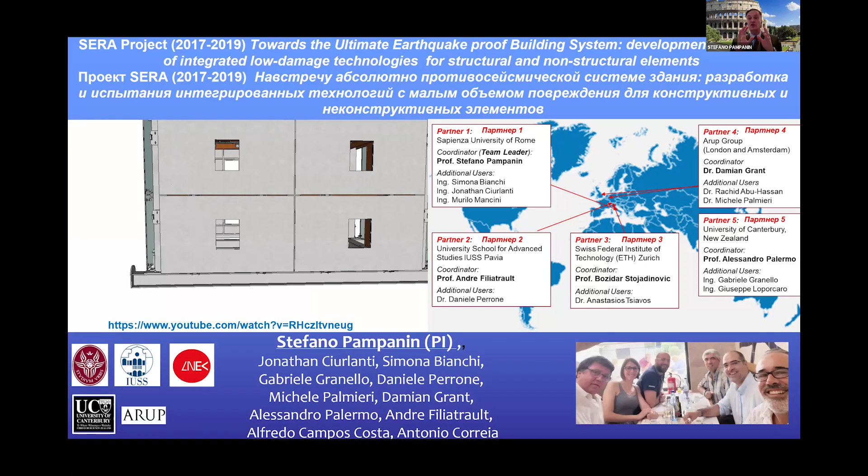We imported this technology into Europe. I was granted, as principal investigator, a big project to test a full multi-story building on a shaking table—a 2-story mock-up building with envelope, not only the structure system. So we have frames, walls, facades made of precast concrete, heavy facades, as well as partitions and glass facades. Look at the experimental test here.

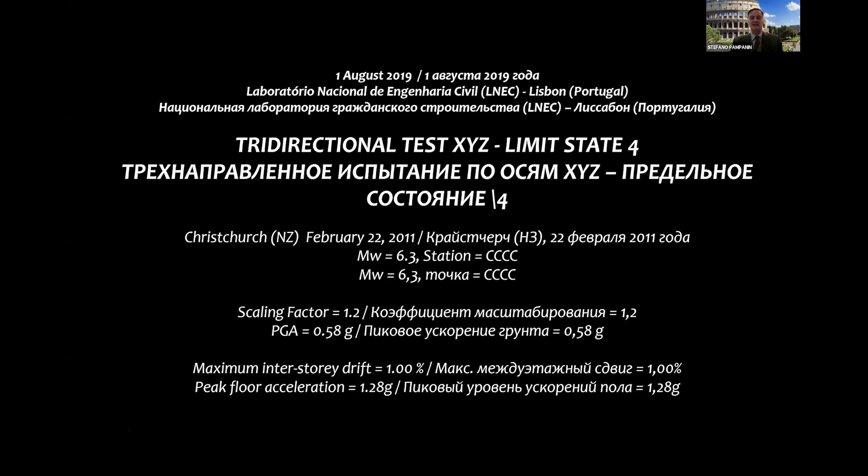Peak ground acceleration of this test was almost 0.6, about 0.58, so we are in a very high seismic region. Let's see what happened—testing the building on the 3D shaking table. The earthquake is actually a very strong one from Christchurch combined with a high vertical acceleration from L'Aquila earthquake, 2009. So really a monster earthquake.

Facades made of glass are detailed in a specific way, and facades made of heavy precast concrete are detailed in a slightly different way than usual, and so forth. We have concrete, timber, clay bricks. You're going to see also the interior parts.

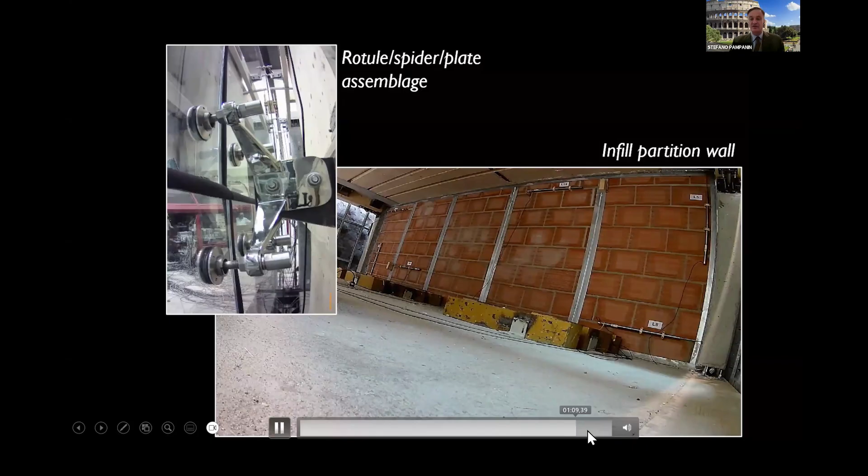Going faster—these are the interior masonry bricks, and you would expect them to be completely destroyed. They're not, because during construction we provide some different detailing, some micro-detailing, and so after the shaking, which is meant to collapse the building, these are basically unscathed. Nothing going on.

How much does it cost? You would be thinking too much. Let's try—I would like to explain to you what progress in this precast concrete technology means.

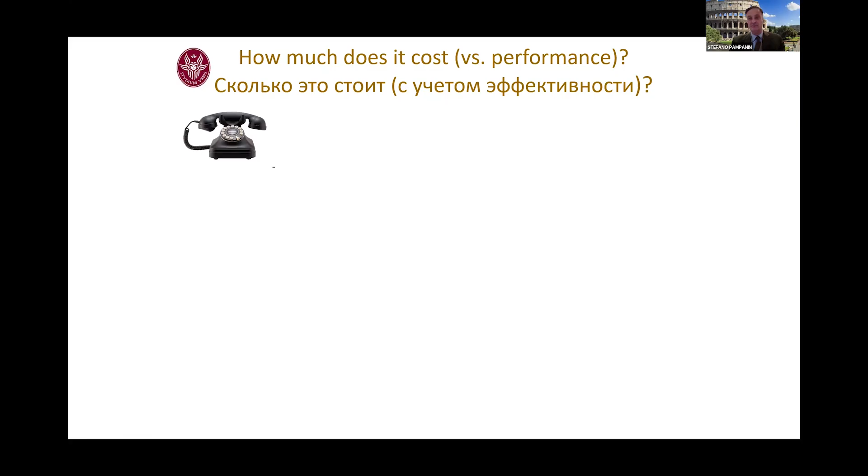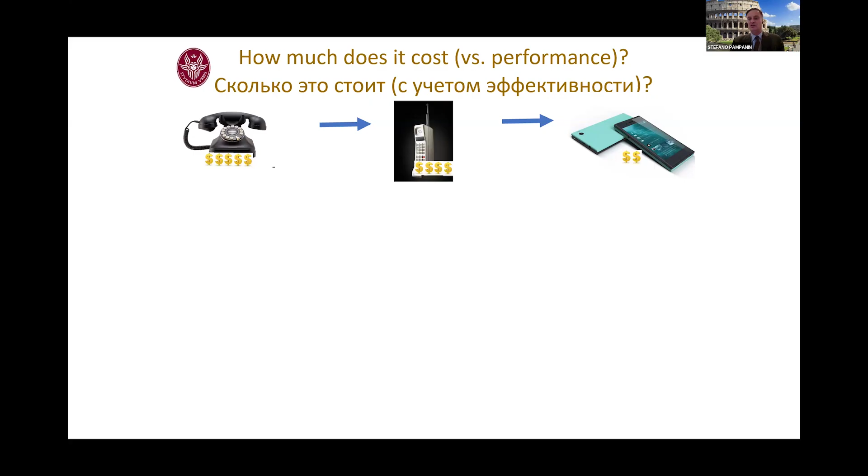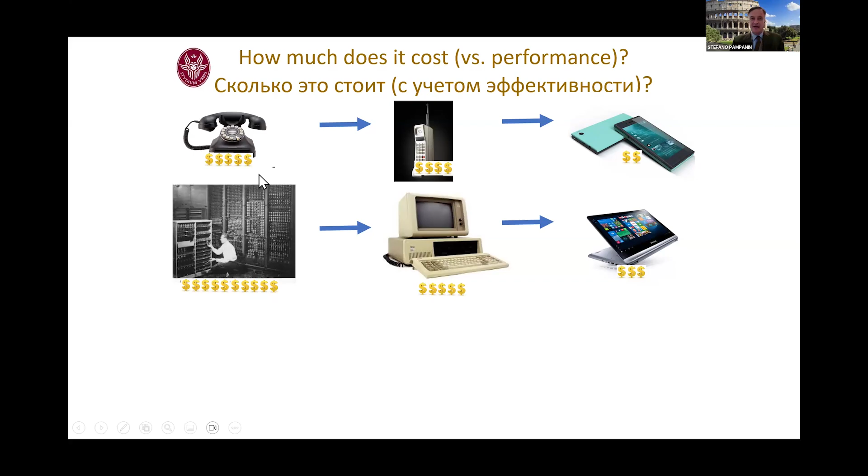Think about older phones, then mobile phones, then smartphones, and thinking about the cost, we can appreciate that the cost is much lower now. If you think about computers, it's even more obvious—a big desktop computer in the 1980s, and later on the cost is lower, while performance went to the sky for both phones and computers, but the cost went lower.

So what about concrete technology? Let me be more specific: precast concrete technology. If we use the pre-capacity design, pre-1970s buildings, they were killing people. If we use the capacity design approach, they are not killing people anymore—these buildings protect life, but they don't protect themselves. If we now move to lower-damage technology made of precast concrete, we are able to protect the business, protect the investment, protect the life commodity, protect continuity, and give resilience to our cities.

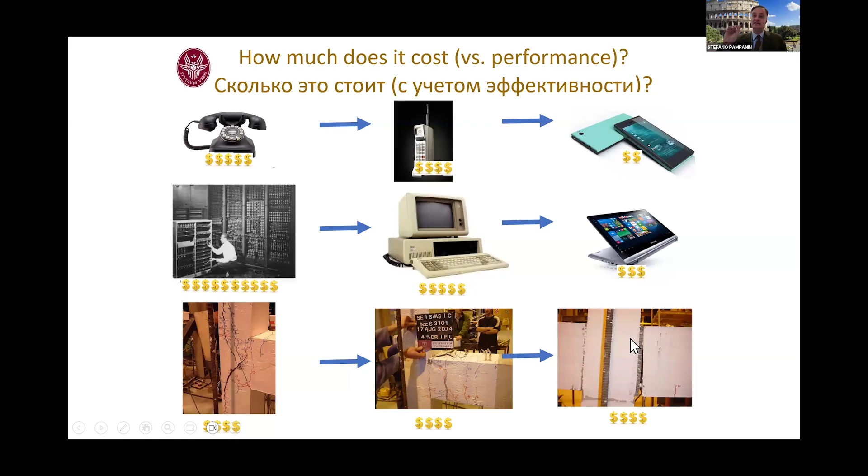So how much does it cost? Let me just say, in a nice way: no, nothing more. It will cost less, I can tell you, because we've done many. But it's important to send the message that it does not cost more—double negative, it does not cost more. So basically, you should be able to use a much higher-performance type of building at equal cost. In English, we say that's a no-brainer choice—a choice that doesn't require a lot of thinking.

I'd like to thank hundreds, to be honest thousands, of people who have been helping through these developments over the years—25 years across many continents, a huge network. Specifically, we pushed very hard starting from San Diego, back into Italy, and then we pushed very hard in New Zealand.

Through the earthquakes, we got a lot of teams coming from different countries to help us, and that has been extremely highly appreciated. After the earthquake in Canterbury, the reconstruction went through low damage technology of any sort: base isolation, dissipation devices of any material, as well as rocking systems, again in any material.

So I'm actually recording the registration, but let me see what happened. Thank you, maybe it's much better to do Kia ora. Thank you for your attention, and grazie per l'attenzione. The registration is continuing, I will be there live with you in a few seconds. So have a very good one in your endeavors, and I'll talk to you soon in a few minutes. See you very soon.

Hello, everyone. I don't know if you can hear me. Yes, we can.

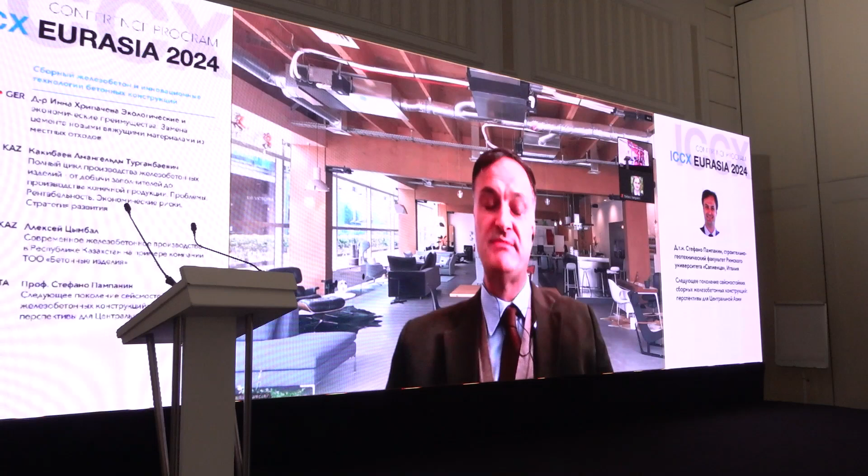The question, can you hear me? Amortizator, I got it. Like in the car, oil filled, like concerning your metal fuses that you mentioned, the question is, can you make it like those oil filled in the car, so that you do not have to replace the fuse, just... Yes, absolutely yes. So in fact, we do call it plug and play, when we're explaining to non-technical people, we call them shock absorber, like in a car. We really say they are like shock absorber in the car.

Now, this type of, you see behind me, if you see, hold on a second, I try. Hold on a second, there you are. Okay, there you are, here, and you see just that's a plug and play in a real building, one of my buildings in New Zealand. So you can have that type of device for literally tens of earthquakes, so maybe you don't need to replace. But we can use viscous damper, which are very similar oil-based or other type of liquid-based, but they are typical of earthquake engineering.

So you can use anything. They become more expensive, while these plug and play cost 15 euros, 15 euros.